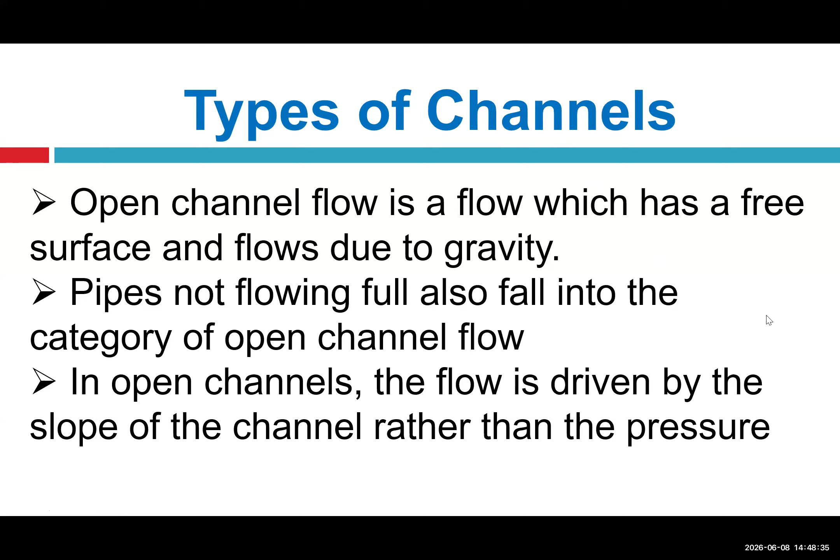So open channel flow is a free flow which has an interface between air and the upper layer of water. Some standard examples of open channel flow in natural systems are rivers, oceans, and overland flow of rainfall, which are examples of free flow that occurs in nature. Can we go to the next slide, please?

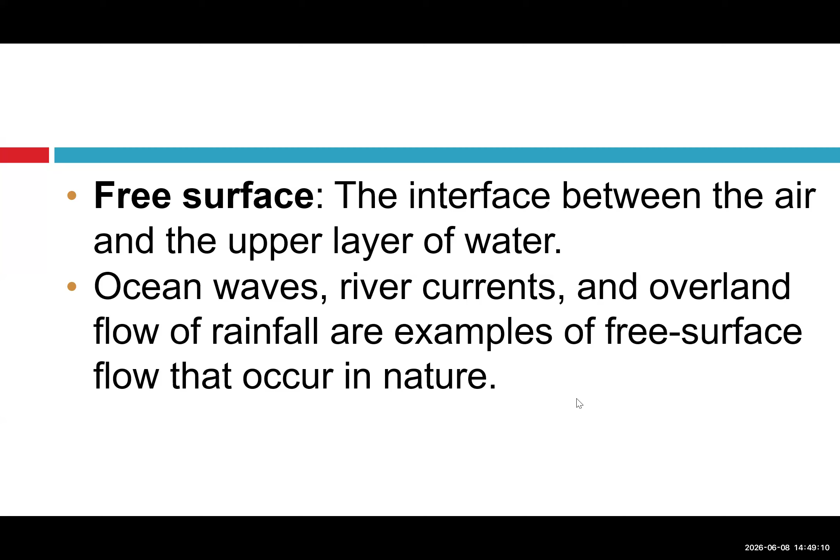So open channels are classified in two different ways. One is natural and another one is artificial channel. So natural channels are like rivers, hillside streams, small rivers, tidal estuaries, small streams, nalas, all categorized as natural open channels, which have irregular shape. Whereas some open channels are categorized as artificial or man-made channels.

So in this, we can classify drains, sewage drains, culverts, sewers, and tunnels. All are examples of artificial or man-made open channels. Can we move to the next slide?

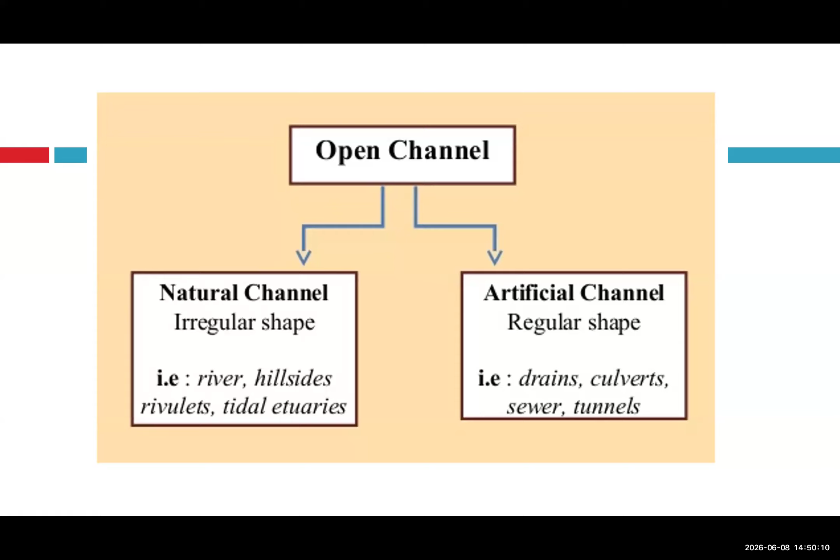Here is the distinction between open channel flow and pipe flow, a standard comparison on the basis of several criteria. So the first criterion is free surface. Open channel flow has a free surface, whereas pipe flow does not have a free surface when it runs full. Then the force which drives the flow in both systems, one is the open channel system and another one is pipe flow.

The driving force is gravity in case of open channel flow, whereas the driving force in pipe flow is pressure difference, or you can say it is a pressure flow. Pressure is hydrostatic, atmospheric at the surface, and in pipe flow it is internal pipe pressure. Examples of open channel flows are rivers, canals, streams, etc. While examples of pipe flow are water supply pipes, oil pipes, and chemical pipelines, all categorized as pipe flow.

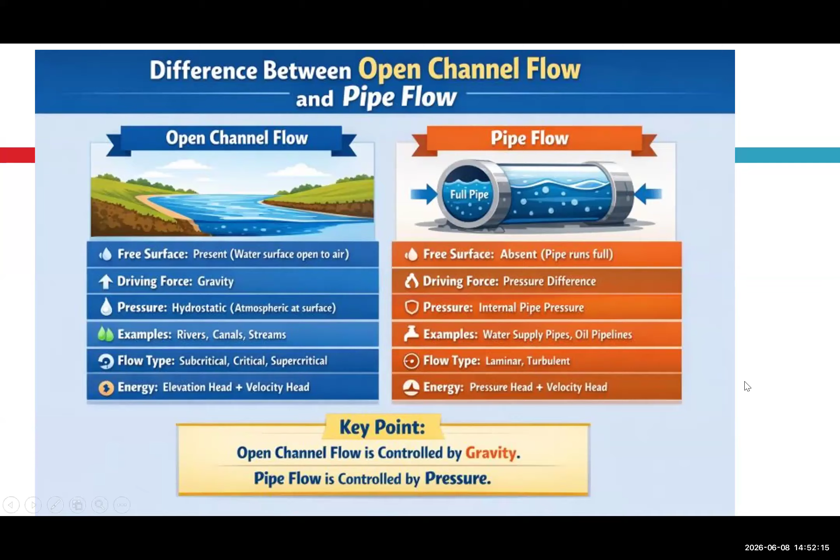In open channel flow, the flow has different types: subcritical, critical, and supercritical. While in pipe flow, the flow can be categorized as laminar and turbulent flow. From the energy point of view, open channel flow has elevation head plus velocity head, or datum head, potential head also. And energy in pipe flow is pressure head and velocity head. Can we move to the next slide, please?

So types of flow in open channel flow. Now we are coming to open channel flow, and here we are discussing different types of flow. From certain criteria, we can majorly classify the types of flow as steady and unsteady flow, uniform and non-uniform flow, laminar and turbulent flow, and subcritical, critical, and supercritical flow. The next slide, please.

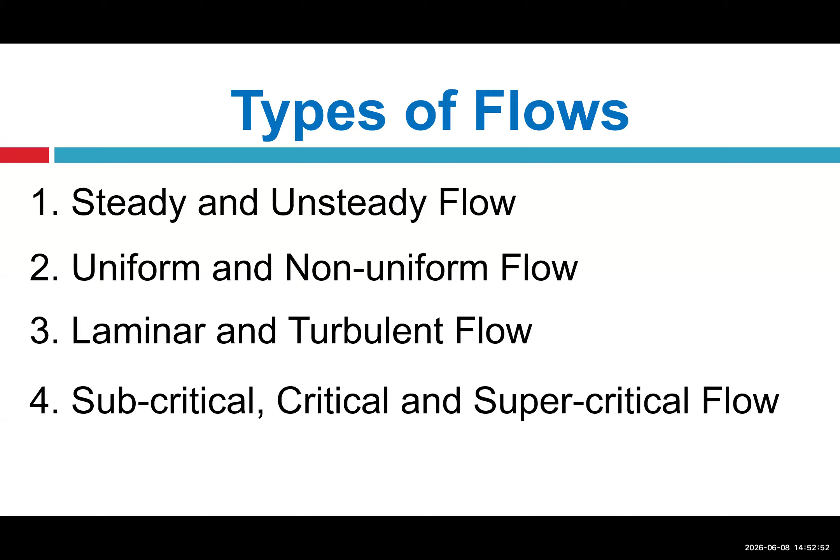Now, let us see how we can categorize steady and unsteady flow. In layman's words, steady means things which don't change with respect to time. That is called a steady condition. In open channel flow, the steady condition means flow parameters like flow rate, velocity, depth, etc. do not change with respect to time. That is called a steady state of flow.

So taking the partial derivatives, ∂Q/∂t = 0, ∂V/∂t = 0, and ∂y/∂t = 0. However, the flow is unsteady if parameters like flow, velocity, depth, or any other parameter change with respect to time at a particular section. In this situation, the partial derivative of discharge, velocity, depth or slope with respect to time is varying and not equal to 0. That is why this kind of flow is called unsteady flow. Can we go to the next slide?

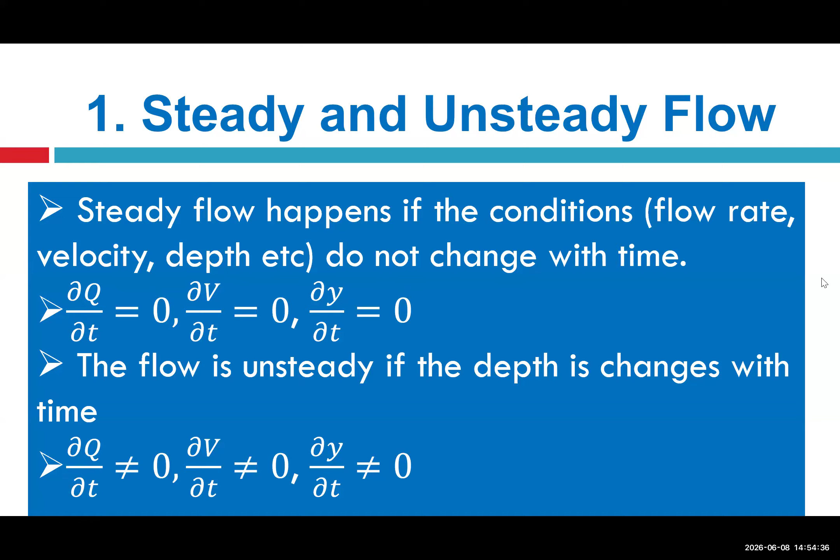Uniform and non-uniform flow. Uniformity means something which doesn't change with respect to space, or in open channel flow, if for a given length of channel, the velocity, depth, or discharge at a particular cross section remains constant throughout the channel section, we call it uniform flow. So the equations are del Q over del S equals 0, del V over del S equals 0, and del Y over del S equals 0. Whereas del Q over del S not equal to 0 signifies non-uniformity of flow. In non-uniform flow, any parameter like discharge, velocity, depth, or slope is not constant with respect to space, referring to the particular reach of channel under consideration. So this is about uniform and non-uniform flow.

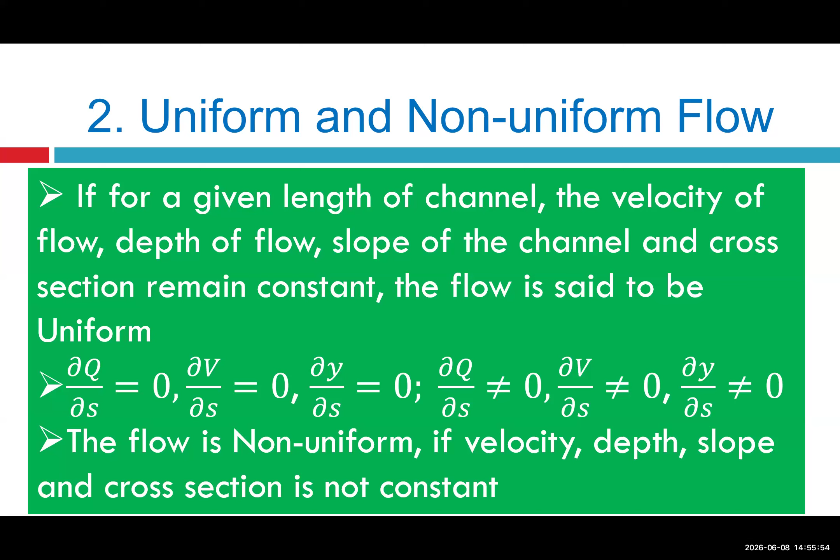Now coming to the next type of flow. So here we are coming to non-uniform flow. We have understood that with respect to velocity, depth, or discharge, it doesn't remain constant over space, meaning the direction. So non-uniform flow is again classified into two types: gradually varied flow and rapidly varied flow.

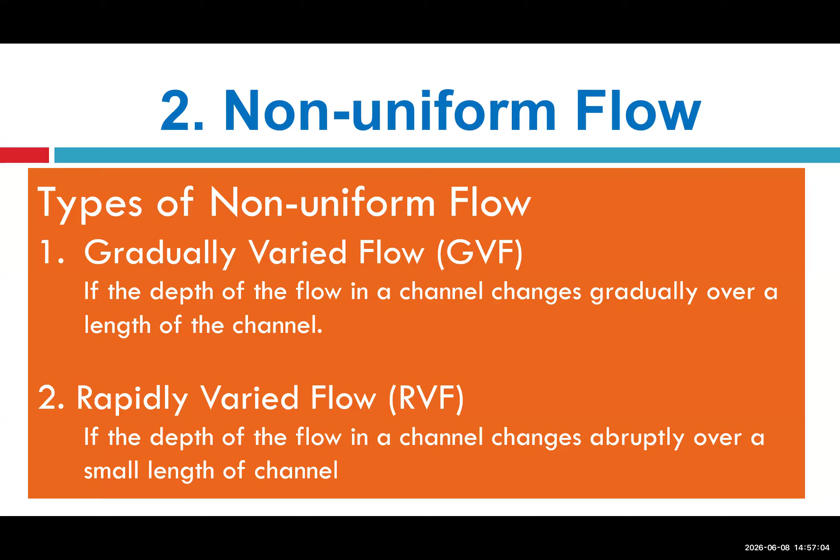If the depth of flow changes slowly over a long reach of canal or channel, and the changes happen gradually, we call it gradually varying flow. However, as the name implies, rapidly varying flow means if the changes in flow happen abruptly over a small length of channel, we call it rapidly varying flow.

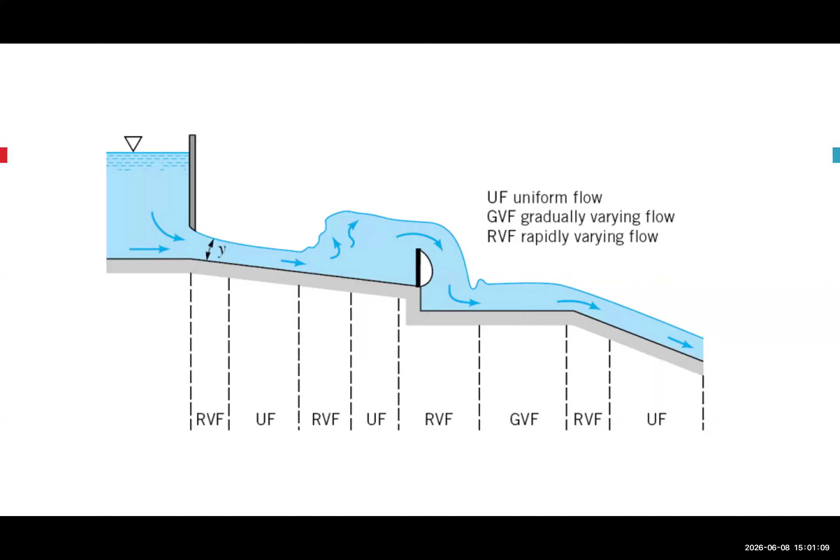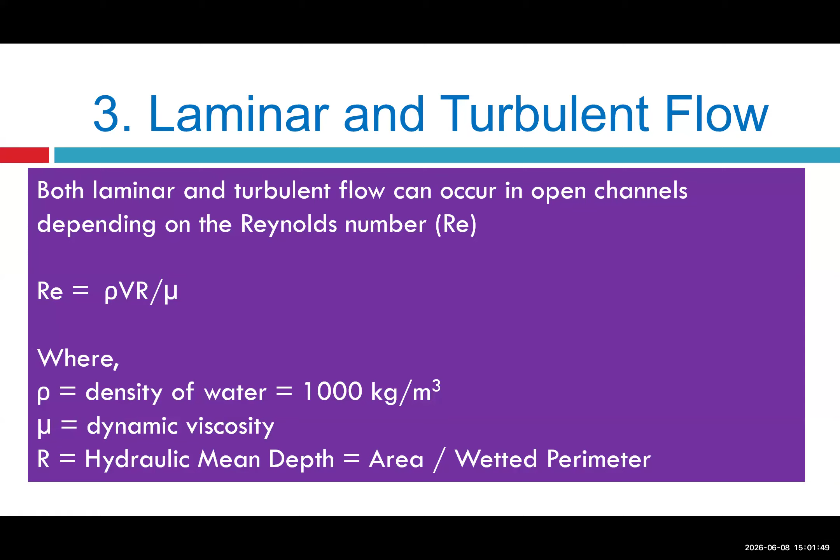The laminar and turbulent flow conditions are the two types which we denote based on the Reynolds number. The equation for Reynolds number is well known: rho VR upon mu, where rho is the density of water, mu is the dynamic viscosity, and R is the hydraulic mean depth, or simply the mean depth. So Reynolds number is the parameter which decides whether the flow is laminar or turbulent.

In open channel flow condition, the Reynolds number represents laminar flow when it is less than 500, transitional flow when Reynolds number is greater than 500 and less than 1000, and turbulent flow condition when Reynolds number is greater than 1000.

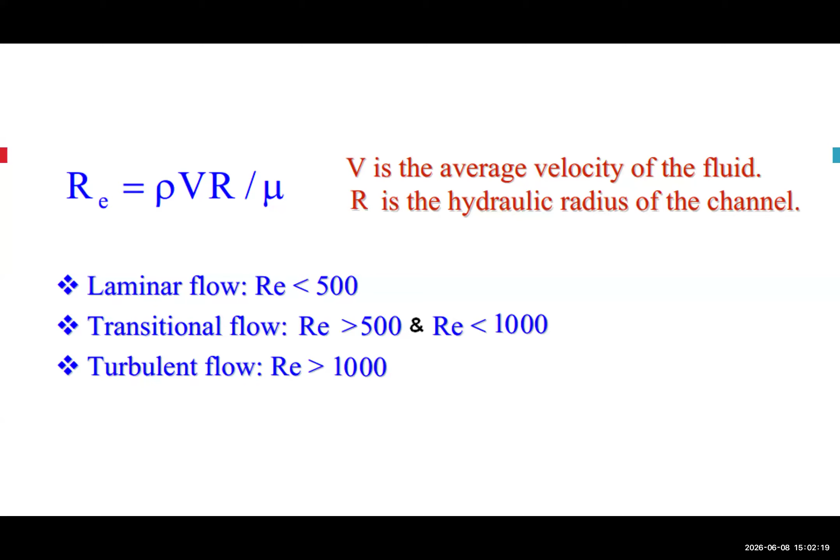Now the fourth type which we are going to discuss is subcritical, critical, and supercritical flow. The criticality is signified with reference to the Froude's number.

The flow in the open channel is said to be subcritical if Froude's number, signified as Fe, is less than 1. Froude's number has the equation Fe equals V upon root GD, where V is velocity of flow, D is the hydraulic depth of channel, equal to the ratio of wetted area to the top width of channel. Here it is written as D, sometimes we also refer to it as R. It's the same thing.

Subcritical flow is also called tranquil or streaming flow. For subcritical flow, the Froude number is less than 1. For critical flow, Froude number is equal to 1. And for supercritical flow, the Froude number is greater than 1. Supercritical flow is also called shooting or rapid condition of flow.

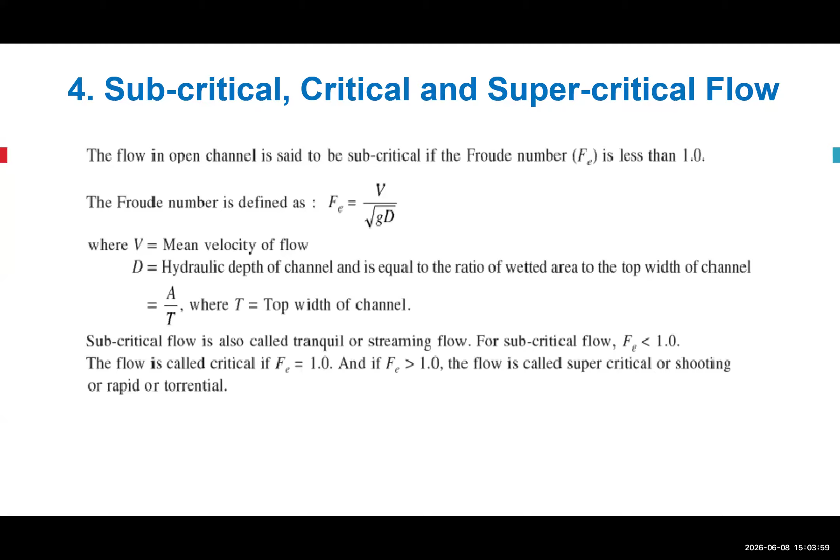So in that situation we call it a hydraulic jump. That condition is called a hydraulic jump. But we will discuss all these things in detail in the later slides.

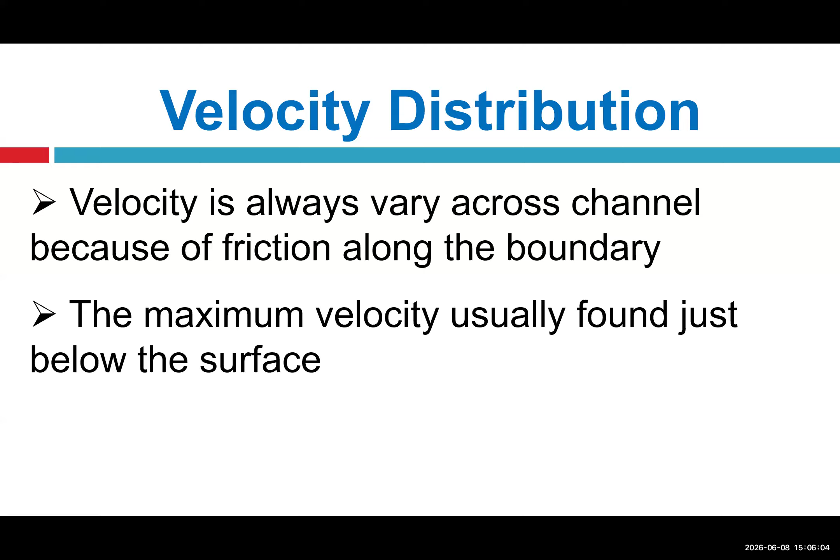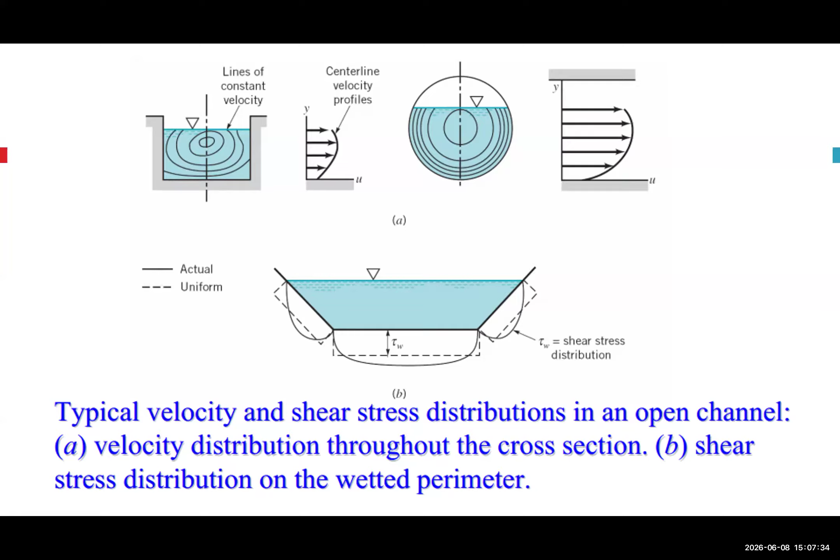Now we are talking about uniform flow situations, and we are discussing several equations used for the calculation of uniform flow and understanding uniform flow conditions. The discharge through open channel flow is computed, and several scientists have contributed to this. Velocity calculation is done by Chezy's formula as well as Manning's formula, where Chezy's constant C and Manning's constant N are used. Bazin's formula and Kutter's formula are also used for velocity and discharge calculation. Next slide, please.

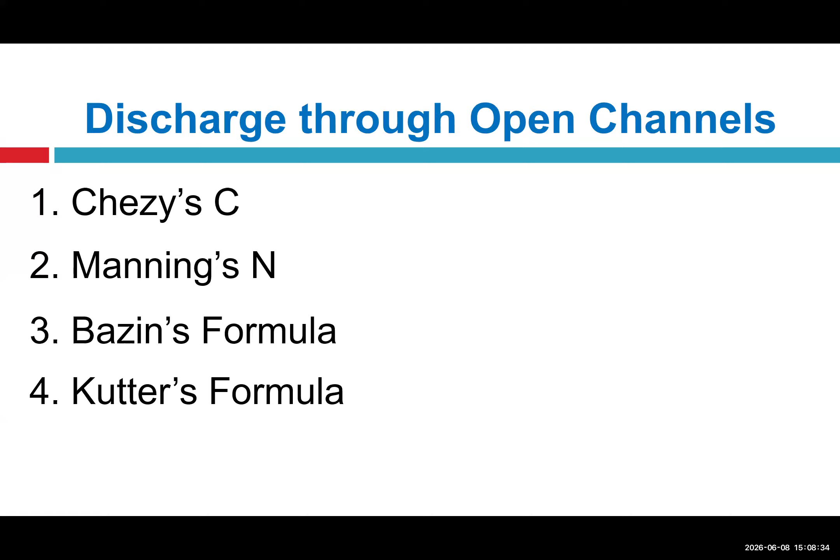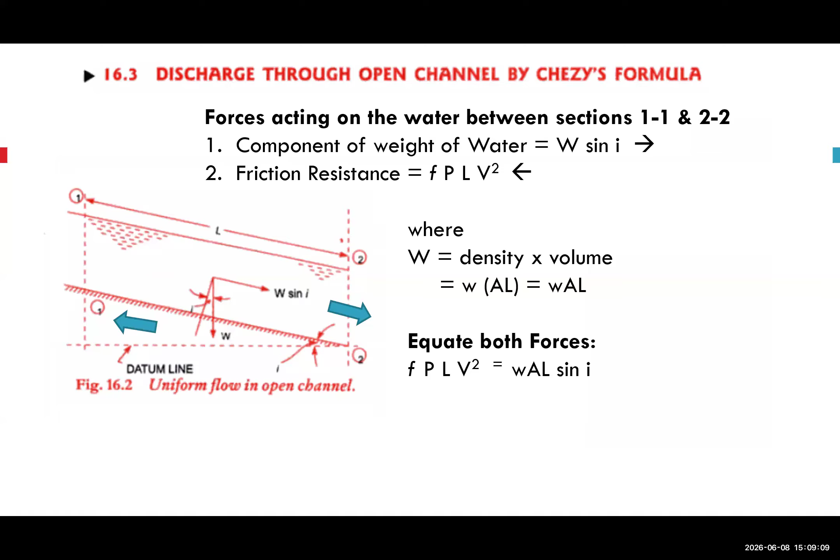Here, a simple example of uniform flow condition is presented. The component of weight is W sine I, where I is the slope, represented between section 1 and 2. The frictional resistance against the water is F P L V square. When we compare both, we get F P L V square equals W A L sine S, also considered as slope I. Next slide, please.

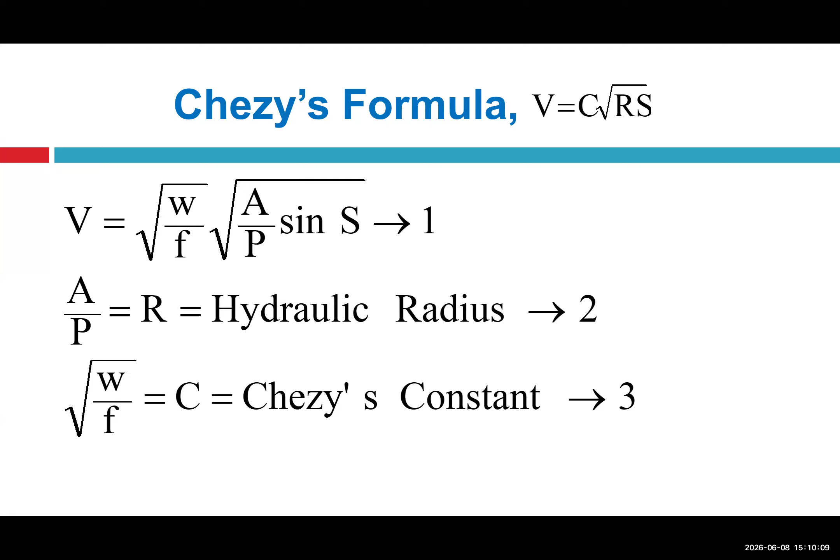Chezy's formula is V equals C square root of R into S, where R is hydraulic mean depth, that is area divided by perimeter, and S is the longitudinal slope of the channel. V is elaborated as square root of W upon F, into square root of A upon P sine S. But sine S is very small, so instead of sine S we consider it as S. Hydraulic radius is A upon P, and W over F is used as a constant, referred to as Chezy's constant. Next slide, please.

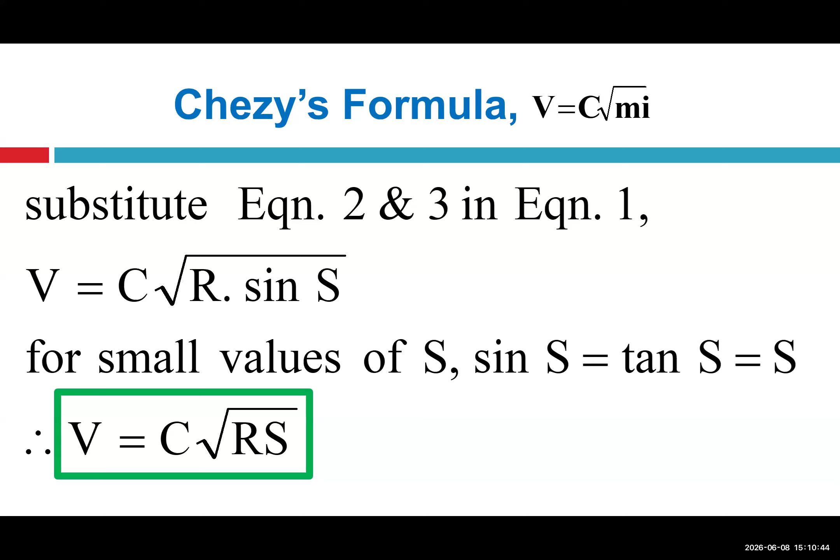In Chezy's constant, the initial equation was V equals C square root of R sine S. But for small values, sine S equals tan S equals S, so we consider the model as V equals C into square root of R into S. Next slide, please.

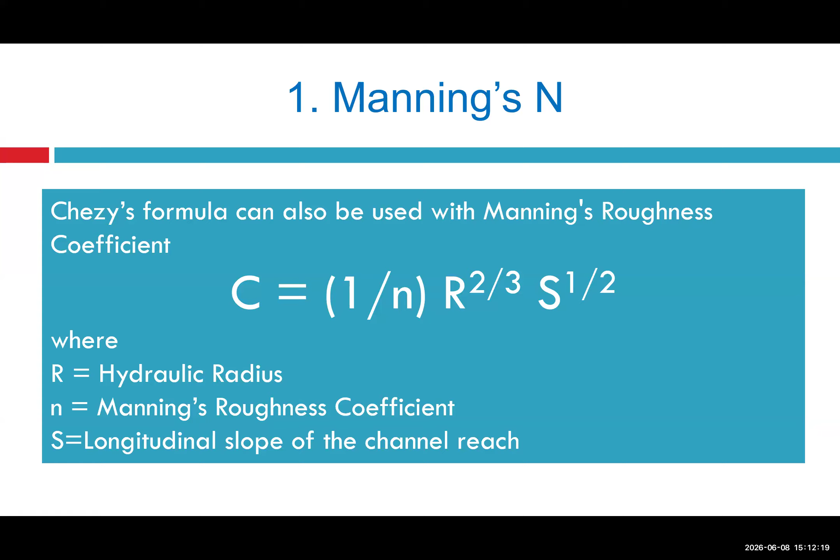Another equation is Manning's equation. There is a typing mistake here - instead of C we should consider C as velocity V. V equals 1 upon N, R raised to 2/3, S raised to 1/2, where N is Manning's roughness coefficient. This roughness coefficient depends on many parameters, like stage of flow in the channel and different kinds of vegetation - for big grass, small shrubs, N value is different. For N values, you can refer to tables from FAO and US Army Corps of Engineers. USGS has several standards and tables for different types of vegetation, flow conditions, stages, and bed and bank material. N value varies based on various parameters. S here is the longitudinal slope of the channel reach. Next slide, please.

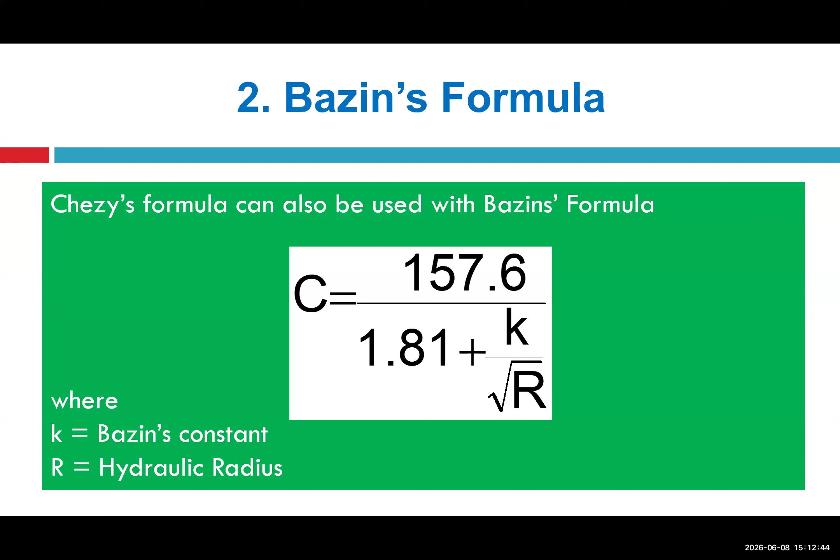Another constant is in Bazin's formula. Here C is 157.6 divided by 1.81 plus K upon square root of R, where K is Bazin's constant and R is hydraulic radius. Next is Kutter's formula. Can we please move to the next slide?

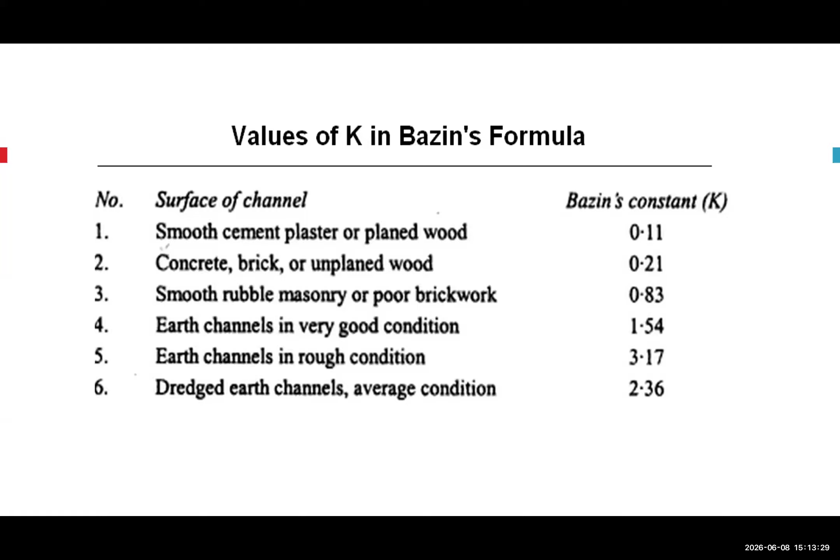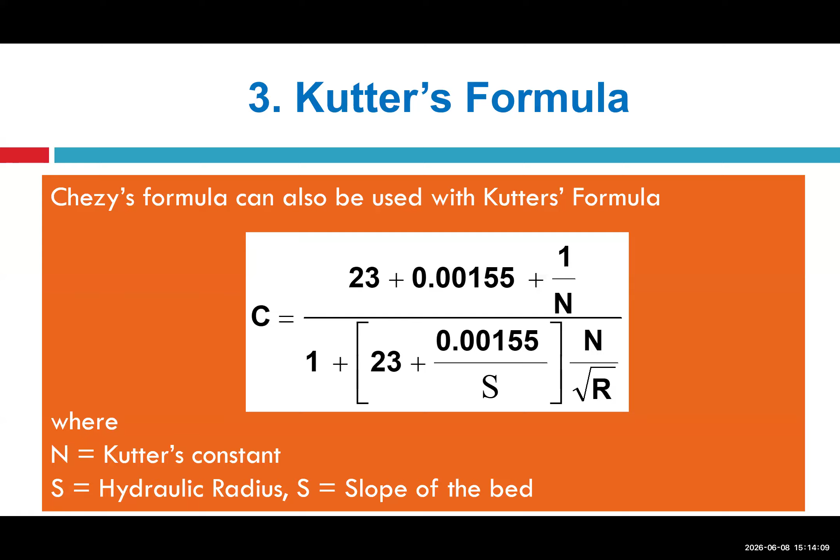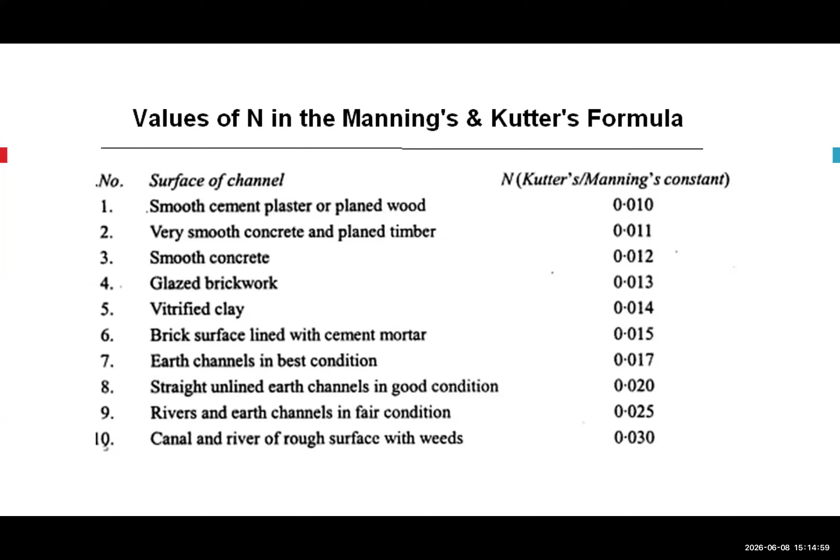Just a second. I just want to take a... yeah. So

Can we move to the next slide, please? Now we are coming to the economical channel section. No, previous one, please. So most economical channel sections here we are discussing. Most economical channel sections are the kind of channel section in which the cost of construction is a minimum. So it has a minimum perimeter, and the minimum or optimal perimeter which can allow maximum discharge is called a most economical channel section.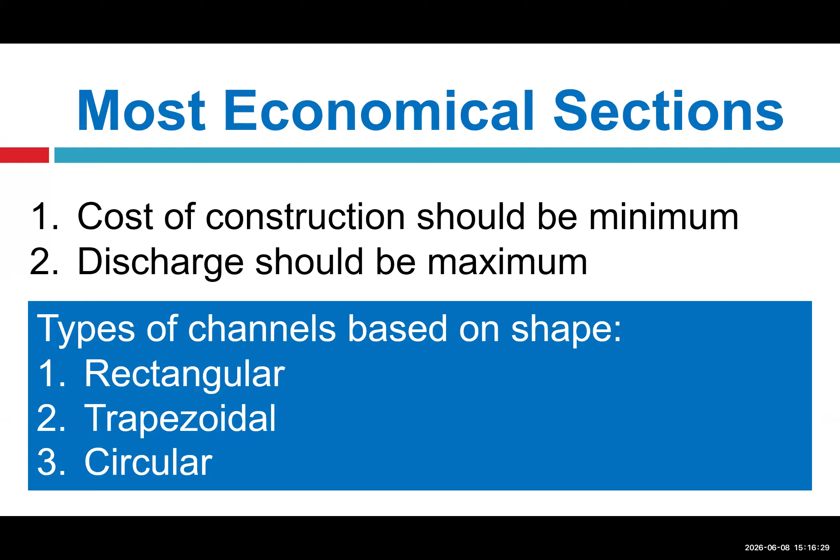Here we are going to discuss the most economical channel section for three different types of channel shapes: rectangular, trapezoidal and circular channels. So next slide, please.

For the most economical channel sections, for discharge we will use the continuity equation. And for velocity, we can use either Chezy's or Manning's equation, as per convenience and as per the data or parameters available in the field. So P minimum and Q maximum is the condition where we can attain the most economical channel section. Next slide, please. This is an example of a channel section. Next slide.

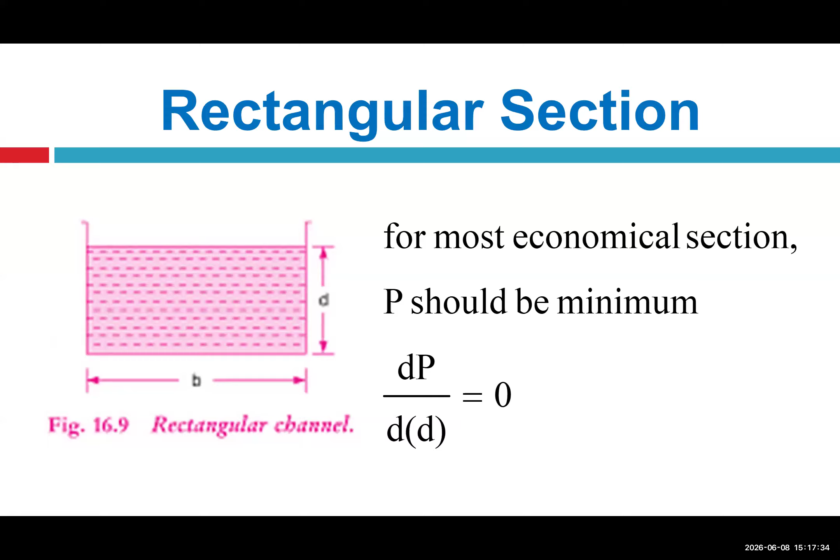Yeah. So the most economical rectangular channel. For the most economical rectangular channel, P should be minimum. So for that, we can differentiate the equation of perimeter with respect to depth. Next slide, please.

So these are the derivations. I will not go deep into this differentiation, but I will just reach the condition, the last one, where hydraulic radius, sorry, mean hydraulic depth or hydraulic radius is d/2 for the rectangular channel section. So in the most economical rectangular channel section, hydraulic radius will be d/2, and depth will be b/2.

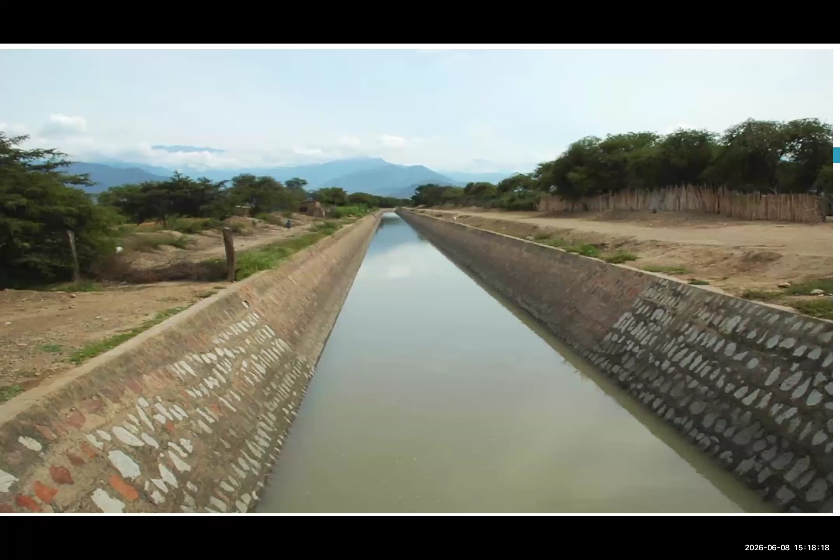Next slide is a trapezoidal channel section. Next slide, please. Here for the economical trapezoidal channel section, again we will differentiate the equation of perimeter with respect to D, depth of flow. Next slide, please. Here, I'm not going deep into the differentiation. If you all need, I can provide you all derived equations for all the conditions.

So for the most economical trapezoidal channel section, top width is equal to 2 times the side of the channel. B plus 2nD divided by 2, half of the top width, is equal to the length of the side of the trapezoidal channel section. Here also the hydraulic radius is D/2, and theta is the angle subtended by the side of the channel with the horizontal. That angle theta is 60 degrees.

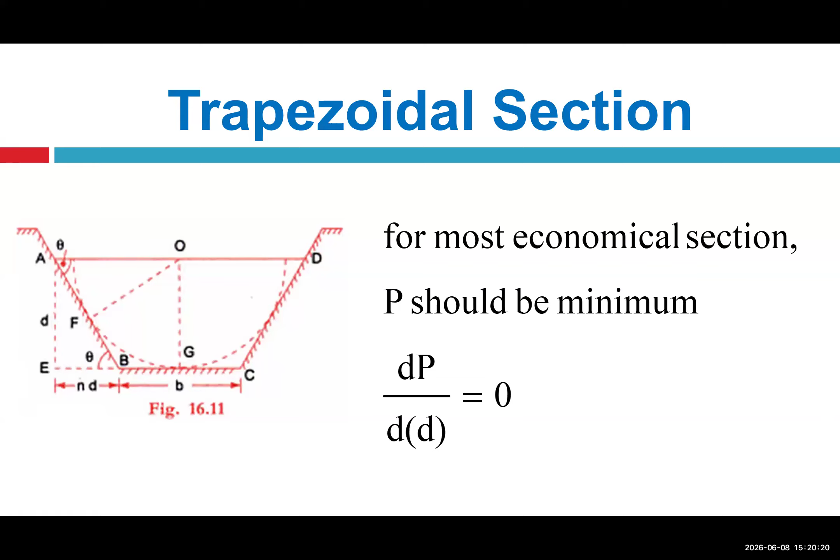In the previous slide, you can see the theta angle here, where the cursor is. This theta angle is 60 degrees in the economical channel section, right? Okay. So the top width, the length of AD, is equal to 2 times AB, the length of AB and CD, right? Next slide, please.

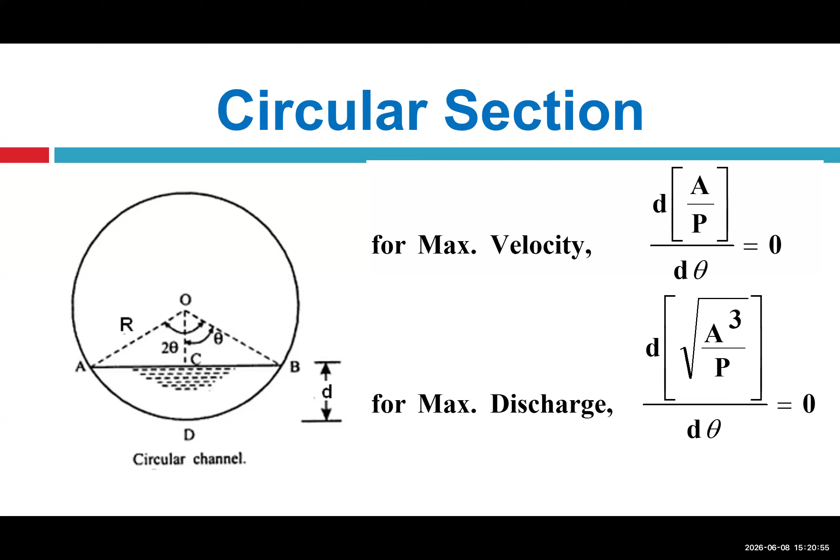Next one is the circular channel section. One more channel section is the triangular channel section. That is not covered here, but if you need, I can share the slide details of the triangular channel section as well. In the circular channel section, the most economical condition is decided based on 2 criteria: one is maximum velocity and another is maximum discharge. Next slide, please.

For the maximum velocity condition, theta is the angle subtended by the ends of the free surface with respect to the center, and that theta is equal to 128 degrees 45 minutes. The depth of water is 0.81 D, where D is the diameter of the circular channel section, and R is 0.3 D for the maximum velocity condition.

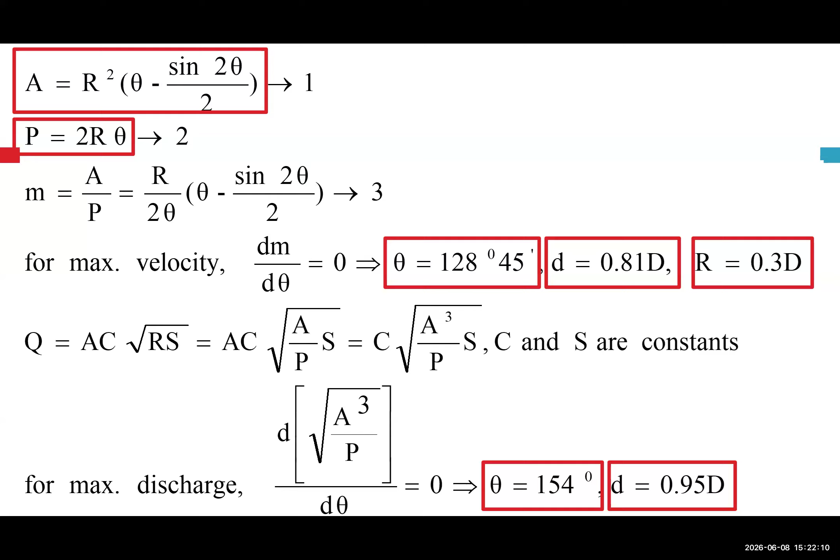Whereas in the maximum discharge condition, theta is 154 degrees and small d is equal to 0.95 D. So these are the conditions attained for maximum velocity and maximum discharge in the case of a circular open channel section. Next slide, please.

Now coming to non-uniform flow. Non-uniform flow is the flow condition when the velocity varies at each section of the channel and the energy line is not parallel to the bed of the channel. This situation is caused by several conditions. So what are those conditions?

Let us understand. One is difference in depth of channel. Next, difference in width of channel. Third, difference in nature of bed. Fourth, difference in slope of channel. And fifth, obstruction in the flow of the channel. These are the different conditions which cause non-uniform flow in the channel. Next.

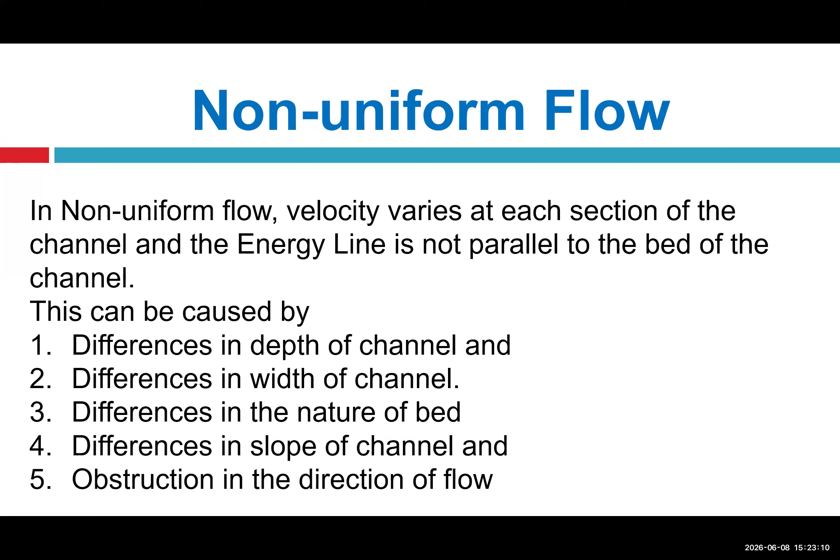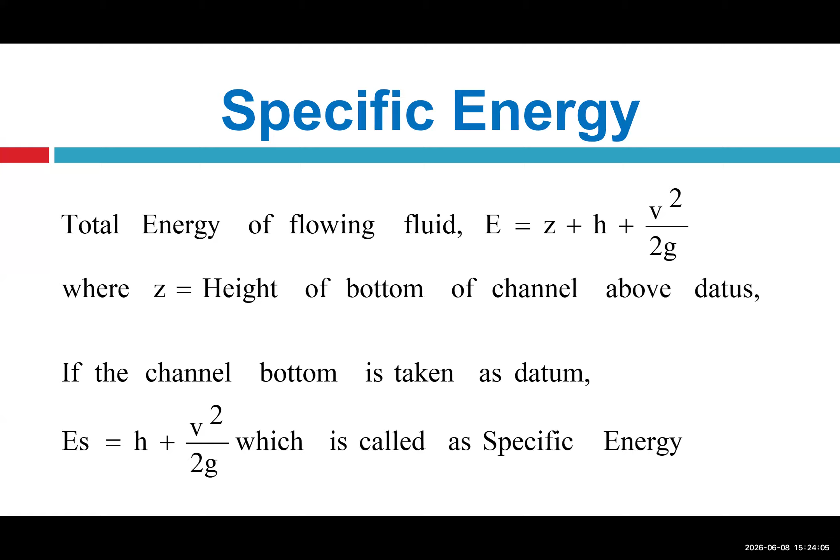When we are talking about open channel flow, obviously we need to know the specific energy concept. So the concept of specific energy is briefly explained here. The fundamental equation which we use for the specific energy is E is equal to Z plus H plus V square over 2G, where Z is the height of bottom of channel above datum. So from the datum line, at what distance the channel is situated, Z is that distance. H is the water head or depth of water, and V square over 2G is velocity head here.

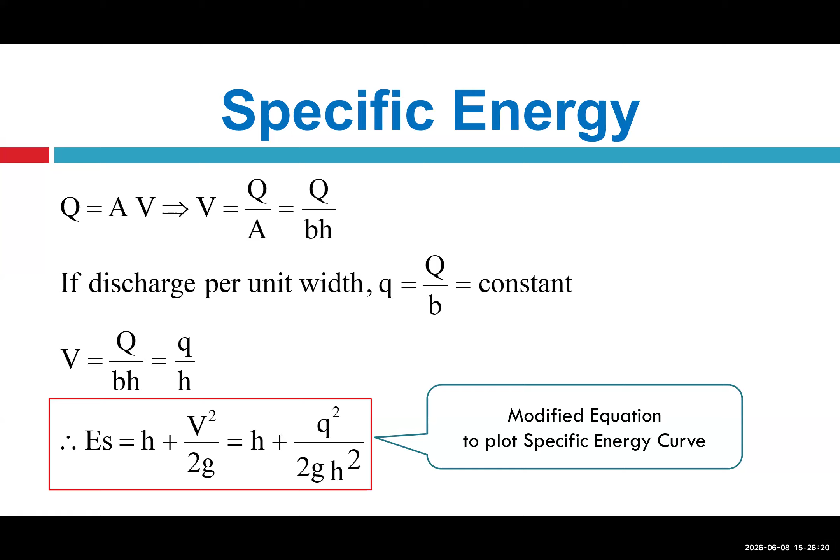The previous equation has two asymptotes. If we plot the energy curve with H on the vertical axis and E on the horizontal axis, we have one linear line at 45 degrees with the horizontal, that is E is equal to H, and another one is a parabolic curve shown in the purple line. And this curve is nothing but E is equal to H plus q square over 2G H square.

Now, when the energy is minimum, that is the critical condition, we need to find the critical depth of the flow. If we differentiate the energy equation E is equal to H plus q square over 2G H square with respect to H and equate it with 0, we find the critical depth, which corresponds to minimum energy. Here we replace H as Hc, because at critical flow the energy is minimum, and at that minimum energy the depth of flow is Hc, the critical depth. So Hc is obtained as q square over G, whole to the cube root.

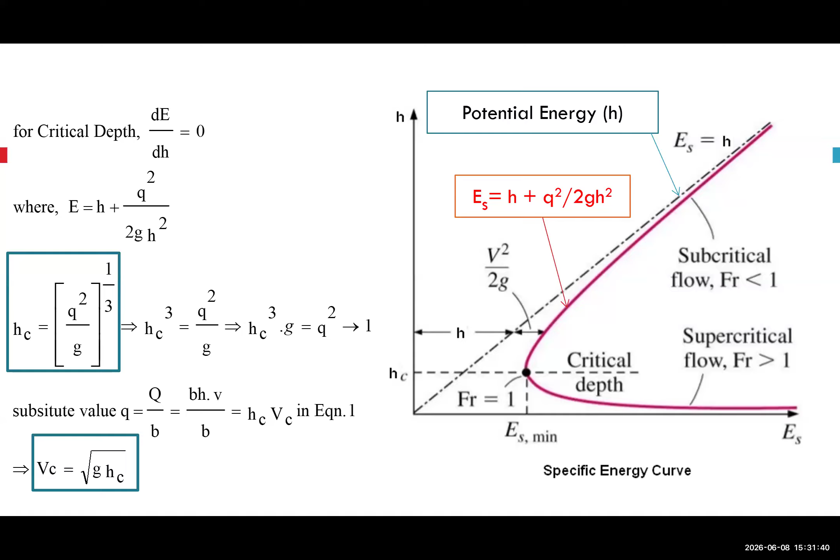Can we move to the next slide, please? Yeah. Next slide. Yes. So minimum and another previous one.

Sorry, previous one. So here we can see that the minimum critical specific energy in terms of critical depth, E is equal to H plus Q square divided by 2G into H square. And when specific energy is minimum, depth of flow is critical, and this critical depth Hc is equal to Q square, that is square of intensity of discharge, divided by G, whole raised to 1/3 power, that is cube root of this.

And finally, substituting in the equation, we can finally get Hc is equal to 2/3 E minimum. That means critical depth is equal to 2/3 of minimum energy, right? Next slide, please.

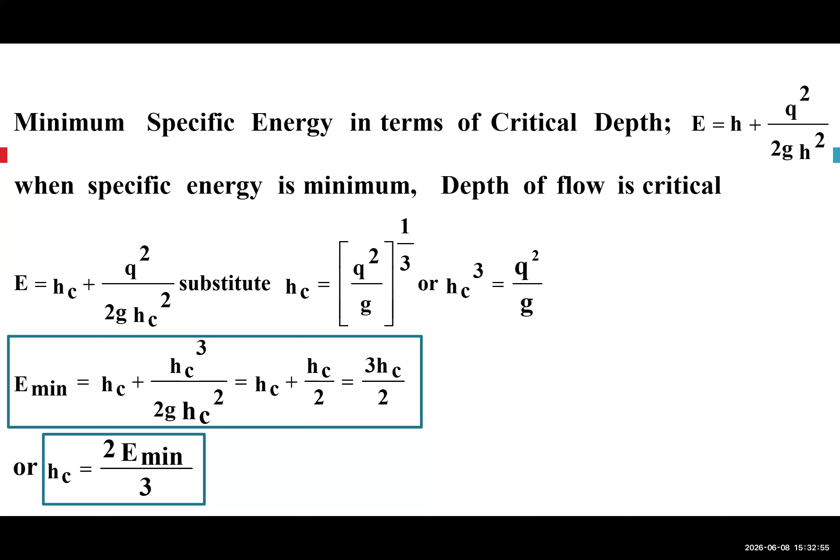So this is shown here with an example specific energy curve in a sluice gate which has a small opening, and flow is taking place from the opening. When the flow is taking place, if we project the water surface line and the different water level lines on the specific energy curve, you can see how the flow is initially in supercritical flow, and then it attains subcritical flow.

And obviously when the flow is in supercritical flow and it tries to meet the subcritical flow, there is a jump, right? And this is called a hydraulic jump. In this situation, certain loss of energy is happening. But you can see that for any energy, there are two depths.

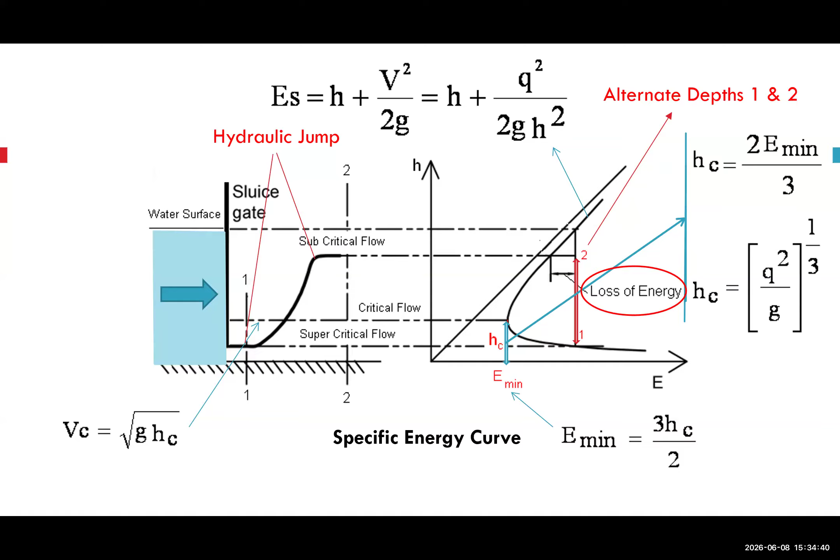And these two depths, depth 1 and depth 2, shown by the red arrow and the marks 1 and 2, are called alternate depths. One is in the subcritical region and another one is in the supercritical region. So depth 1 here is in supercritical flow condition, and depth 2 in this curve is in subcritical condition. Next slide.

So alternate depths are the two depths that are possible for a given specific energy for a particular discharge intensity, right? And for these conditions, we have several equations. The discharge intensity is q equals square root of 2g y square into bracket E minus y. And at this condition, Froude number is V by square root of g into y, or you can write it in terms of discharge intensity also.

In terms of discharge intensity, it is small q divided by square root of g y cube, and critical depth is q square over g whole to the power 1/3. Ec is equal to 3 by 2 critical depth, or critical depth is equal to 2 by 3 E minimum. Next slide.

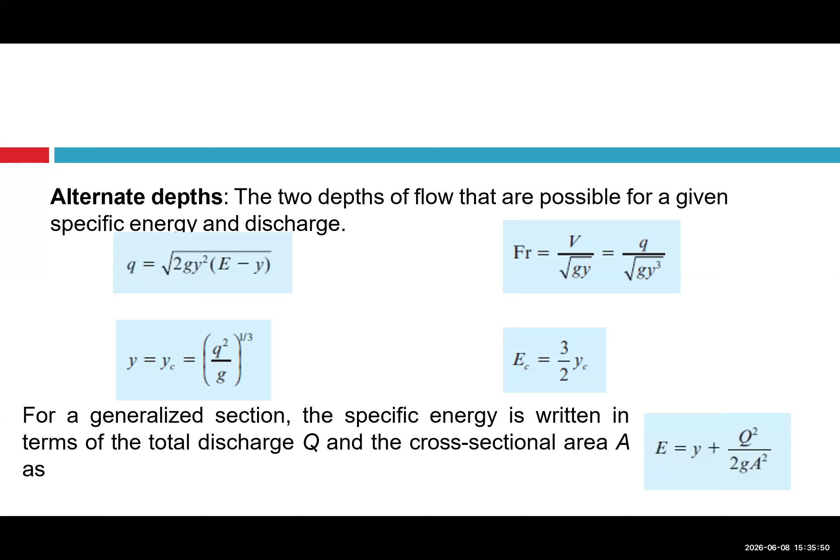And now the concept of specific energy is applied in two different conditions to understand flow transitions. So there are two different types of flow transitions. One is vertical flow transition and another one is horizontal flow transition.

So here, actually all this concept takes too much time. Explaining only specific energy and derivation of alternate depth and all, I take 2 lectures of 50 minutes. So here I'm moving very fast, and I understand that it is an FDP, so concepts are known to the faculty members, and I just brief the important ones.

So this one is the choking condition we are discussing. Choking is the case of vertical transition. The condition of choking of flow implies that the minimum specific energy exists within the transition in case of vertical transition. So it is the case of raised hump. If you refer to any standard book like Open Channel Flow by Ven Te Chow, or by Hanif Chaudhry, or by Subramanya, you can find this as the raised hump condition.

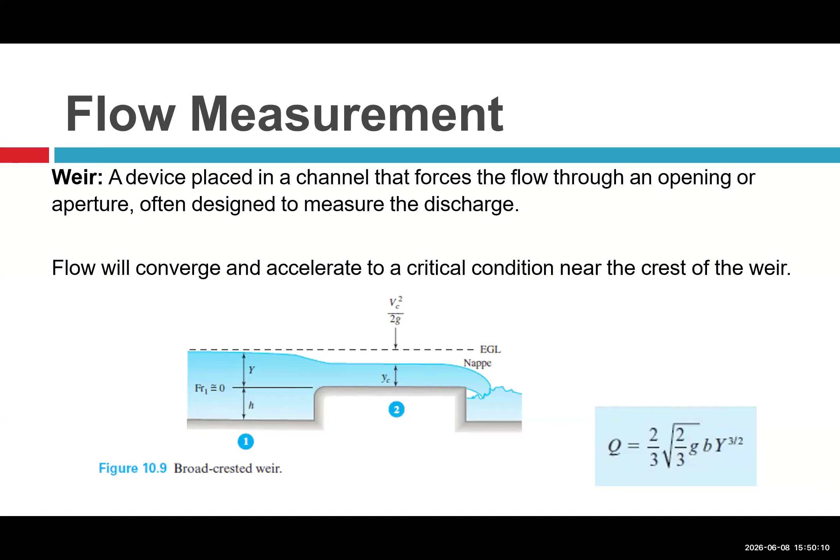Yeah, so we are also supposed to complete the program. So we can quickly move to the slides. Please move to the next slide.

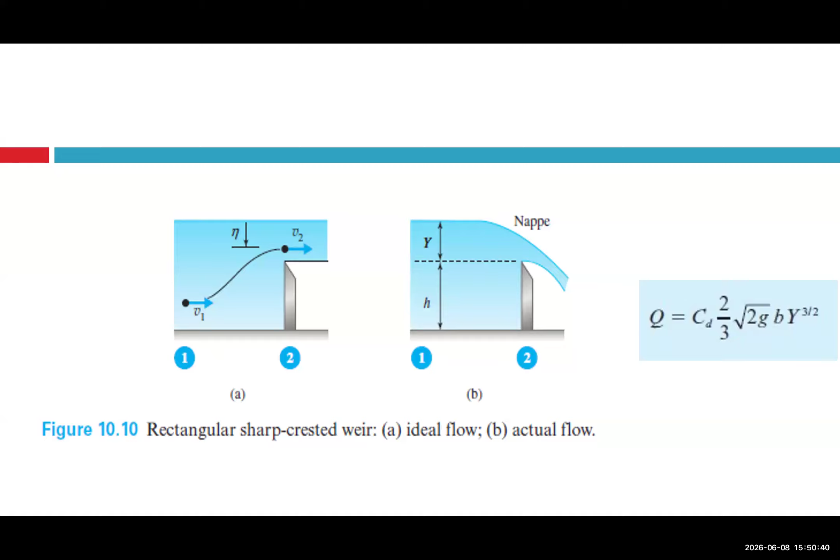This one is another example where we can measure the discharge. This is a sharp crested weir, and in figures A and B there are two types of flow: ideal flow and actual flow condition, where discharge is measured with the formula Q = CD × 2/3 × √(2g) × B × Y^(3/2), where Y is the depth of flow at section 1. Next slide, please.

Another application of flow measurement is the notch. Here we have two types of notch: one is a rectangular notch and another is a triangular notch. The discharge formula used for the rectangular notch is CD × 2/3 × √(2g) × B × Y^(3/2).

And in case of the V notch, or triangular notch, we have the formula CD × 8/15 × √(2g) × tan(θ/2) × Y^(5/2). These are very important expressions on which several MCQs are asked in competitive examinations, where θ is the angle subtended by the two sides of the V notch. Next slide.

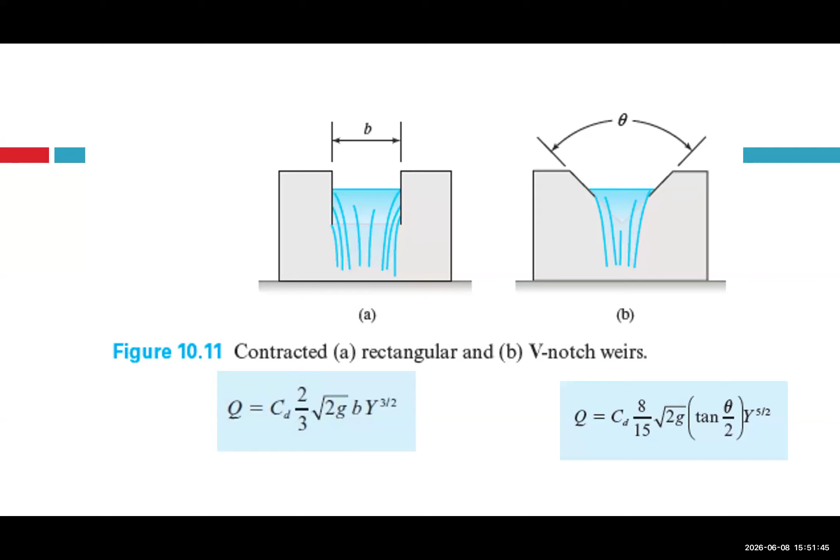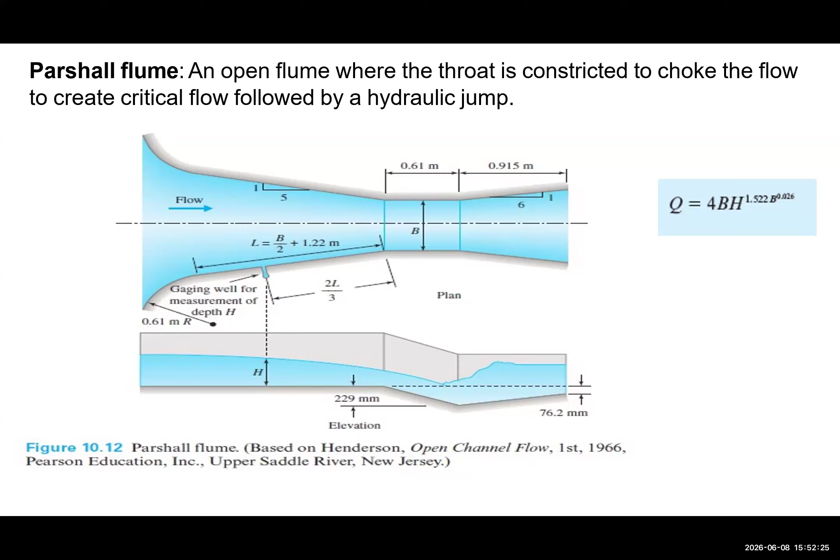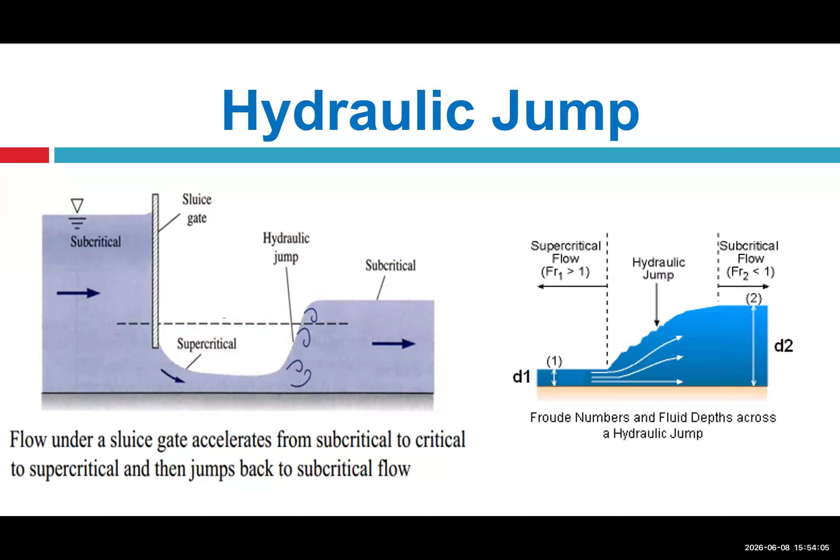To take an example, someone at ground level wants to jump onto the boundary. So what do we do? We take a jump, and because of the jump we can climb onto the boundary of any building. The same way, the flow is also taking a jump here, and this type of jump is called a hydraulic jump. Next slide, please.

Here the momentum concept is also applied to understand hydraulic jump. The momentum is also called specific force. Momentum M = A·Ȳ + Q²/(gA) is the formula. Next.

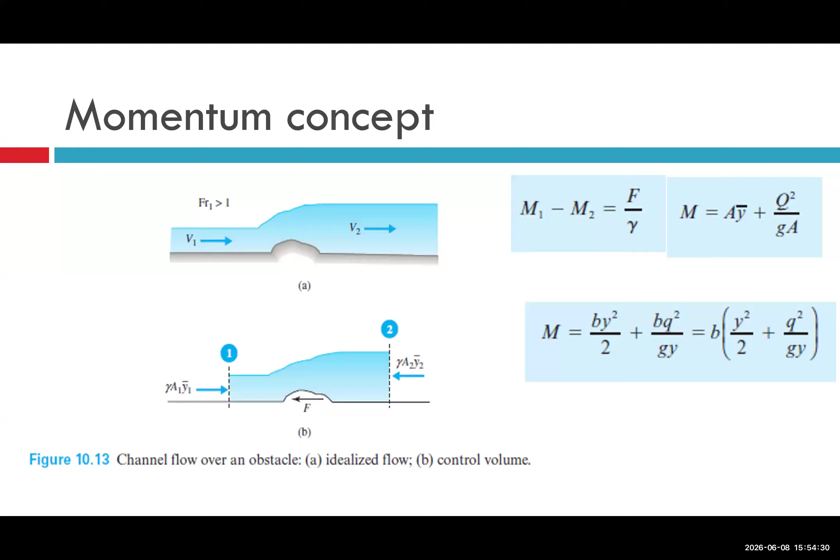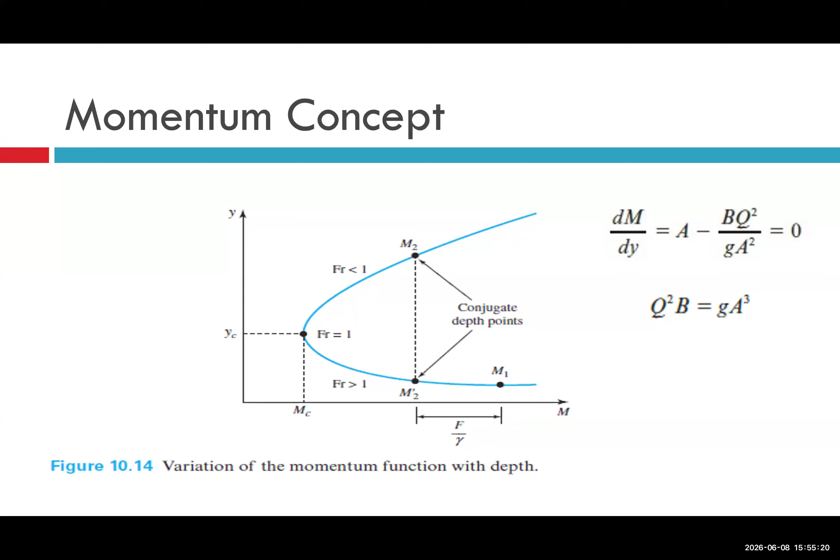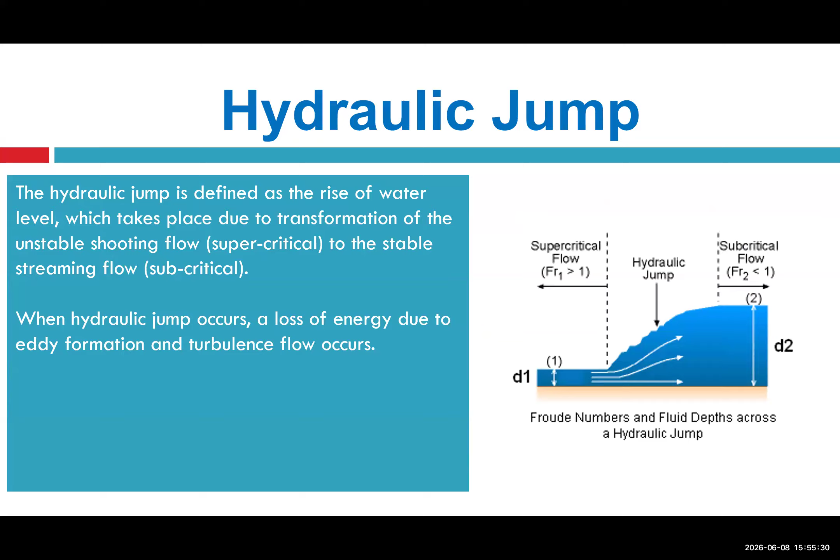In the previous example image of hydraulic jump, D1 and D2 are called conjugate depths. Next slide, please. These are the basics of hydraulic jump. You can move to the next slide.

What are the causes of hydraulic jump? Several causes of hydraulic jumps are: below control structures like weirs or sluices used in the channel, when any obstruction is found in the channel, when a sharp change in the channel slope takes place, and at the toe of a spillway, dam or sluice, etc. Right? Next slide, please.

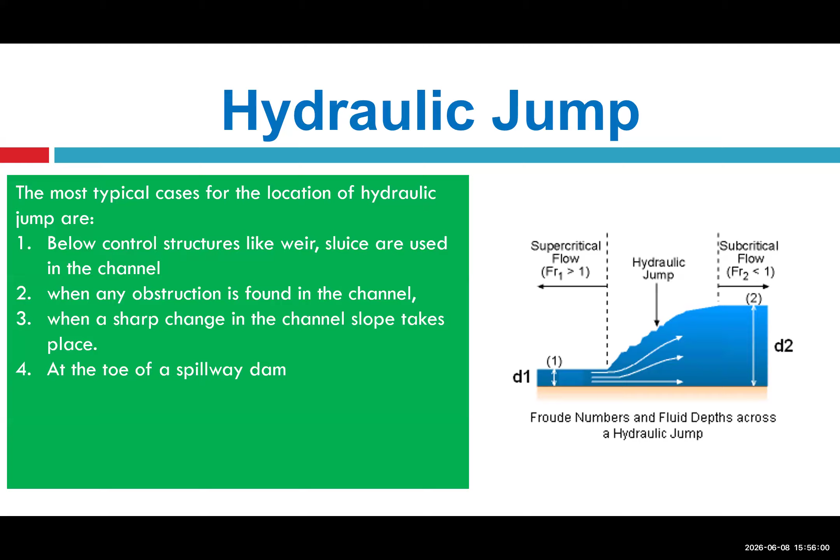The loss of energy which takes place in the jump we can abbreviate as HL. This is the difference E1 minus E2. E1 is the energy at section 1 and E2 is the energy at section 2. So the expression is D2 minus D1 whole cube divided by 4 times D1 into D2.

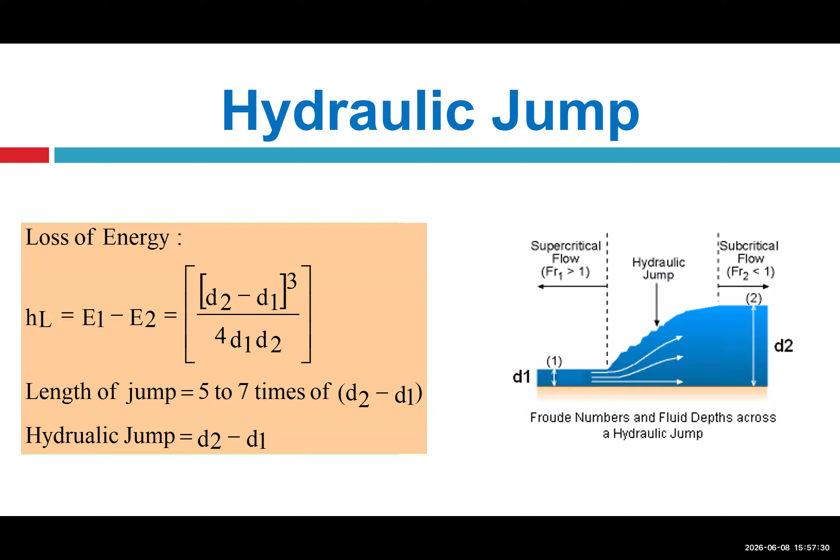Generally, the length from this point to this point is called the length of jump, and the length of jump is 5 to 7 times the difference of D2 minus D1. And the effective depth of the hydraulic jump is D2 minus D1. Next slide.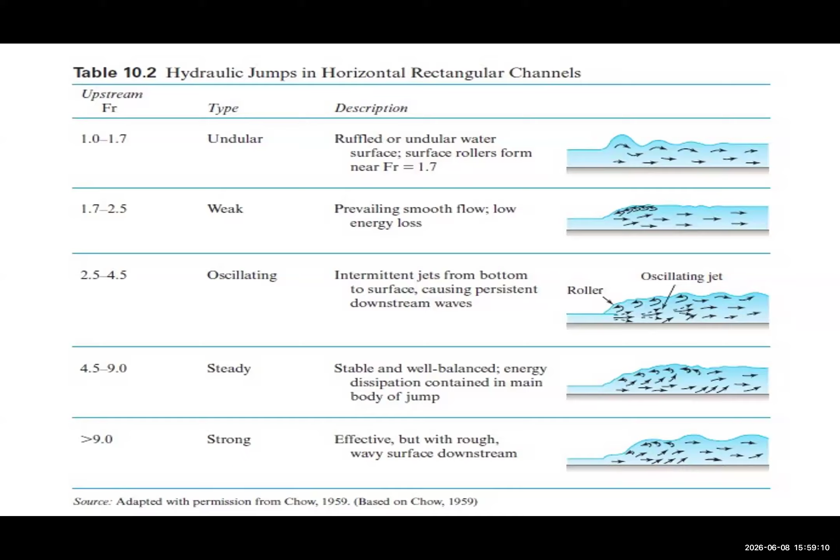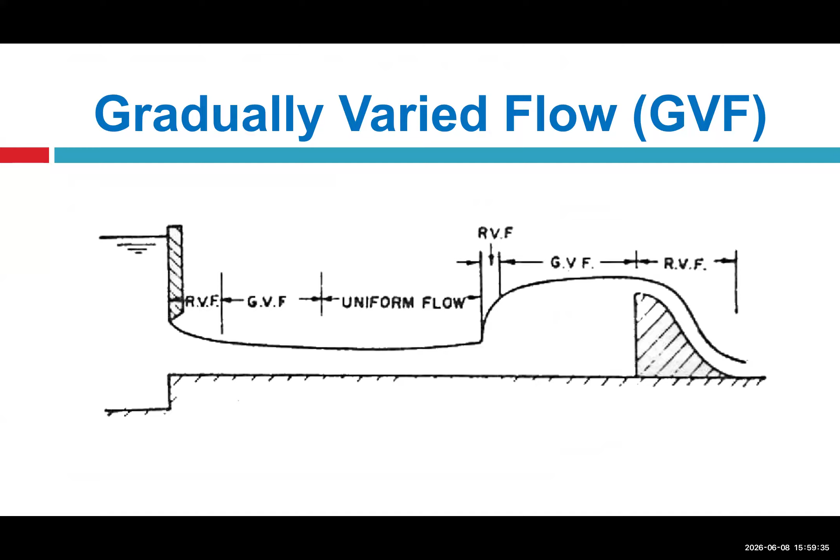This is an example of gradually varied flow. The last type of open channel flow is GVF, which we call gradually varied flow. My cursor is shown here. From this to this, the flow regime is called GVF, gradually varied flow. And here also, before the weir, the GVF is from this to this. Next slide, please.

There are several classifications of GVF with reference to SO and SC. SO is the slope of the channel bed, and SC is the critical slope that sustains a given discharge as uniform flow, where the depth of flow is critical, right? So how are the slopes classified? When SO is greater than SC, or normal depth is less than critical depth, the bed is a steep slope.

For critical slope, the bed slope is equal to the critical slope, and the normal depth of water is equal to the critical depth. For mild slope, the bed slope is less than the critical slope, and the normal depth of water is greater than the critical depth. For horizontal slope, the bed slope is equal to 0, and for adverse slope, the bed slope of the channel is negative. So these are the classifications of slopes. Next slide, please.

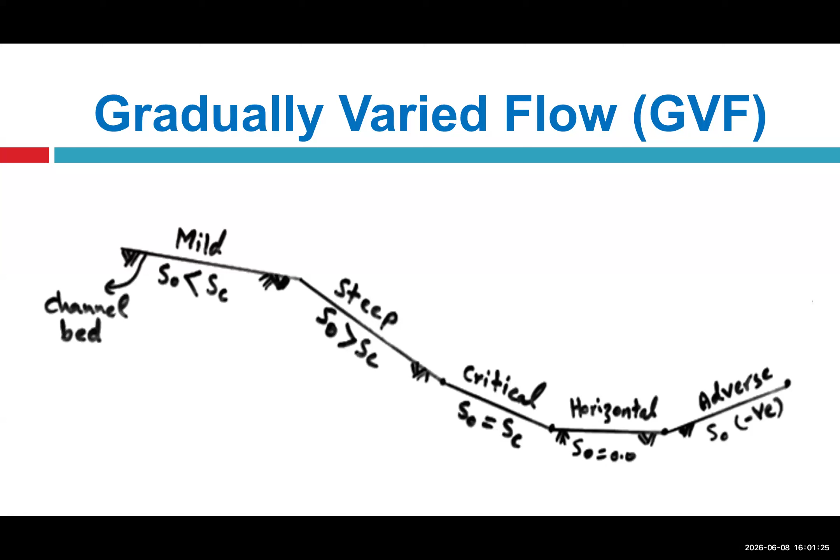Several profiles are there. There are 13 profiles which exist. Clear-cut profiles exist in M1, M2, and M3. M stands for mild slope, and zones 1, 2, and 3 are classified. When gradually varied flow occurs in a zone, if we draw the bottom of the channel, the critical depth and the normal depth of the flow, with reference to that we can classify it as M1, M2, M3. Can we go to the next slide? There we can have a clear idea of how M1, M2, and M3 happen. Can we move to the next slide, please?

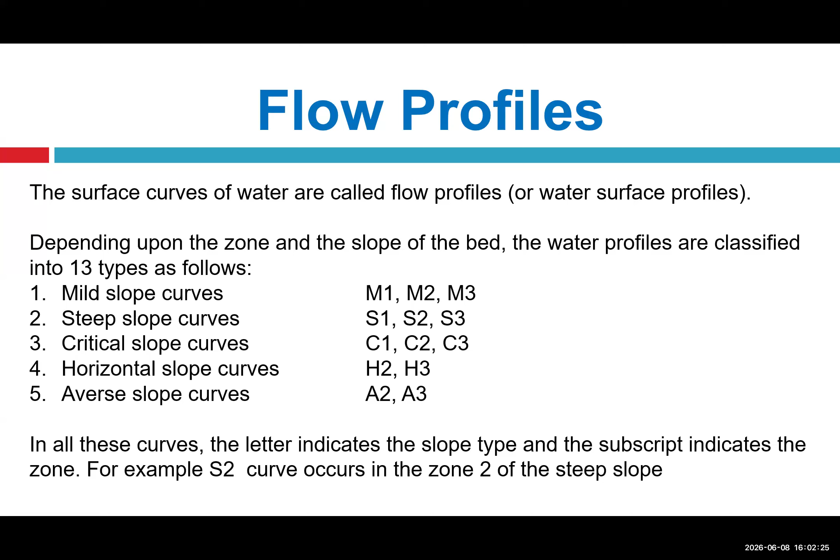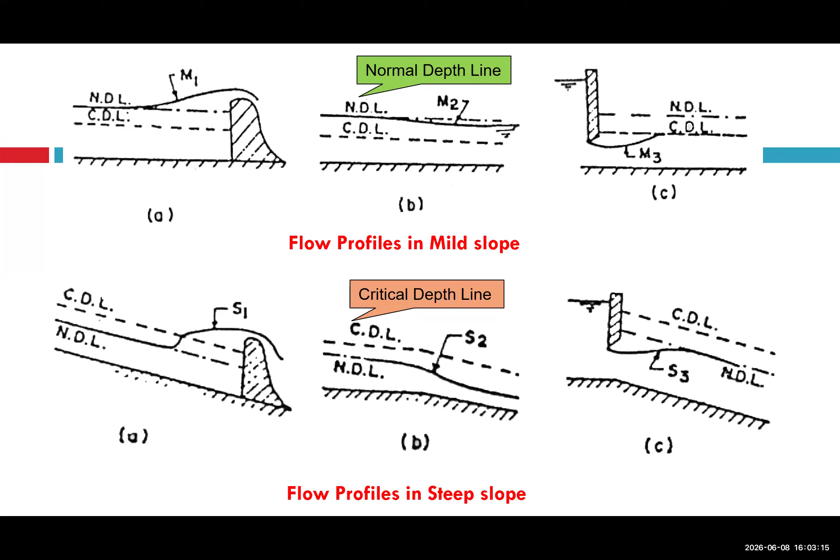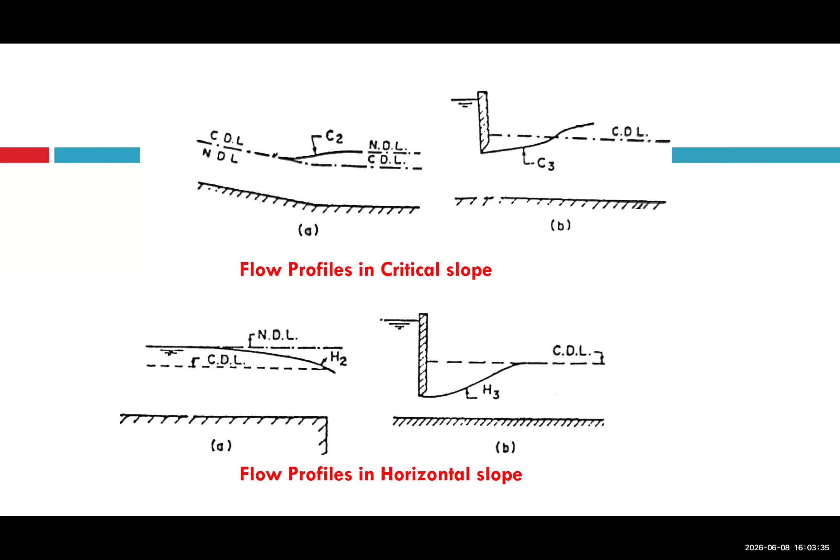In critical zone, critical flow, critical slope, C2 and C3 are happening, and also same way H2 and H3 are happening. There is no C1 and H1. A2 and A3 are also happening.

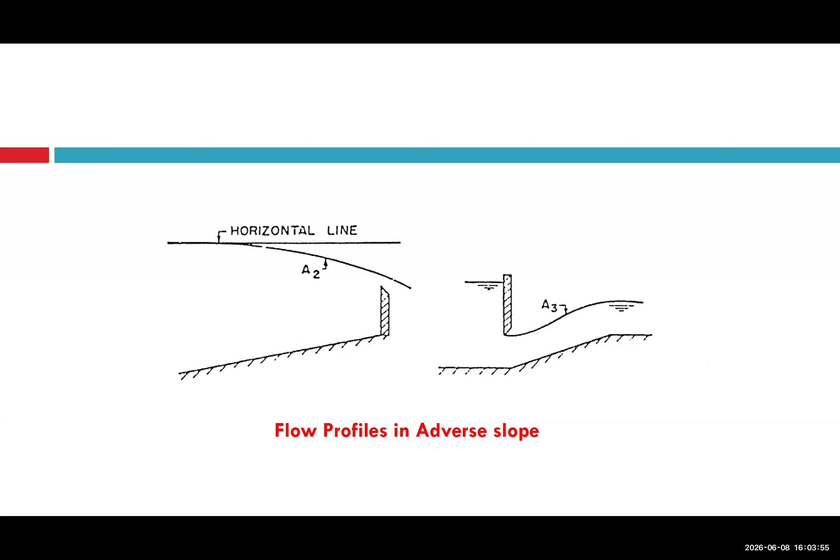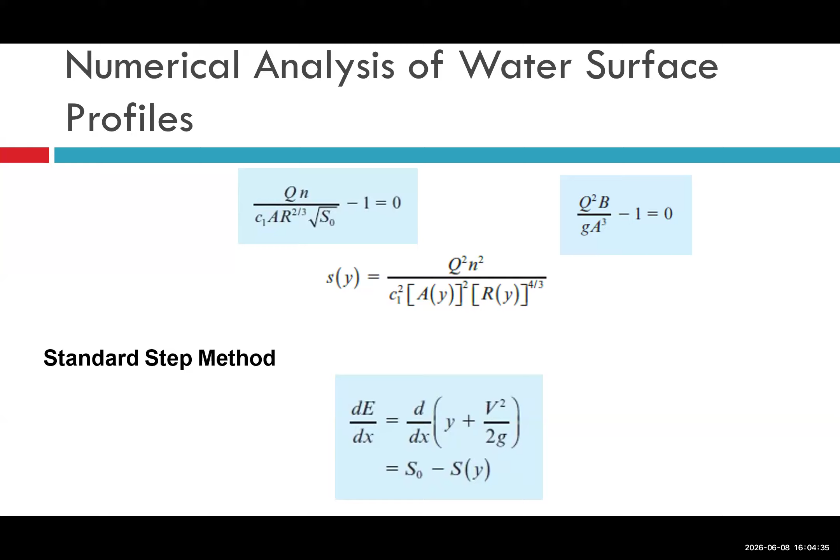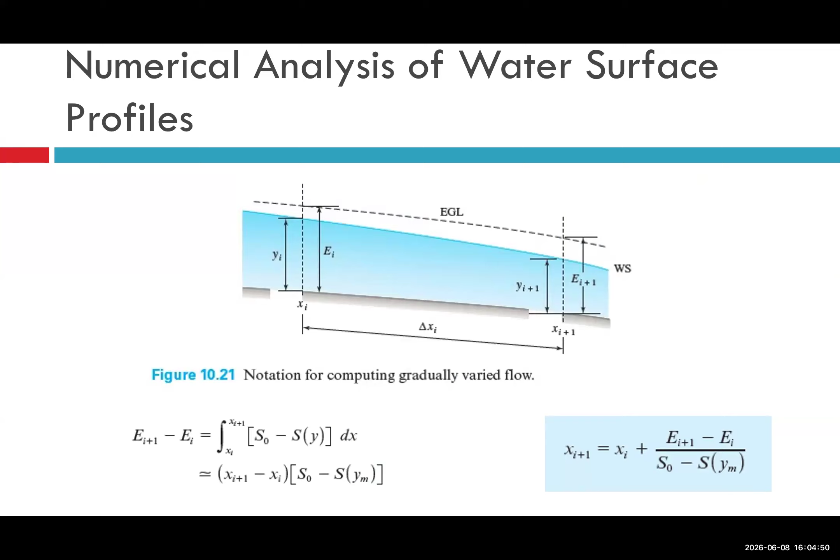See another example of numerical method, analytical method. The expression for this is in equation 1 and 2, as mentioned.

Numerical integration method here: this long expression is used for the numerical integration method, and a useful integration scheme is the 2-point Gauss-Legendre quadrature expression. These analytical methods are applied for the exact calculation of depth.

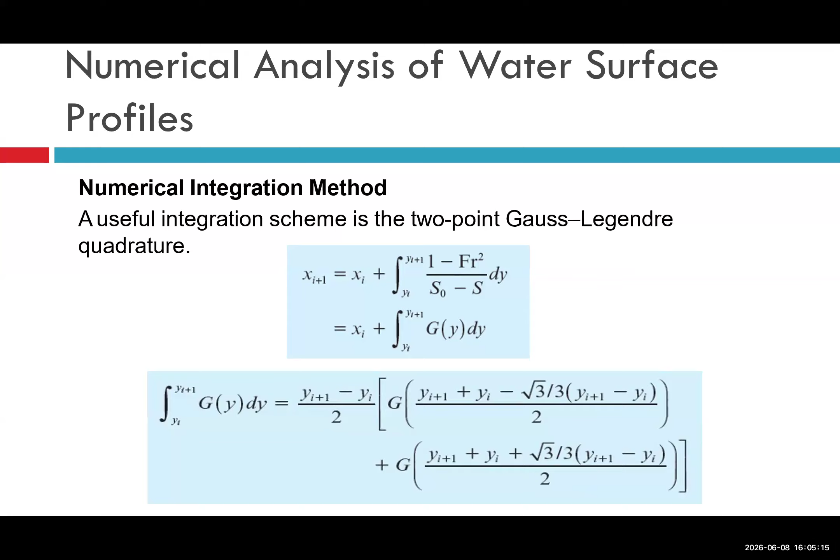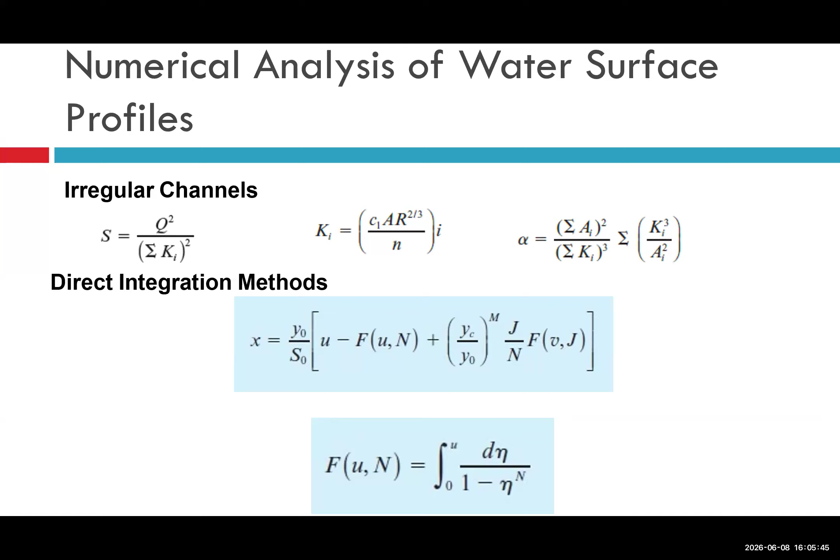Here, this is my case study: the Galudih Barrage at Jamshedpur on the Swarnarekha River.

This is a simulation which we have done. One of my PhD students has carried out this research, and in this we have simulated the Swarnarekha River. Here at the cursor point, the Galudih Barrage is situated, and this is the upstream side of Swarnarekha, where we have taken almost 3 kilometers upstream, and one tributary like Gara Nala, on my cursor, which is meeting the Swarnarekha River upstream of Galudih Barrage.

This simulation for the Gara Nala is also being done with the help of HEC-RAS software. This is open source software developed by USACE, United States Army Corps of Engineers services. So this is the open source software we are using for developing the simulation of this gradually varied flow.

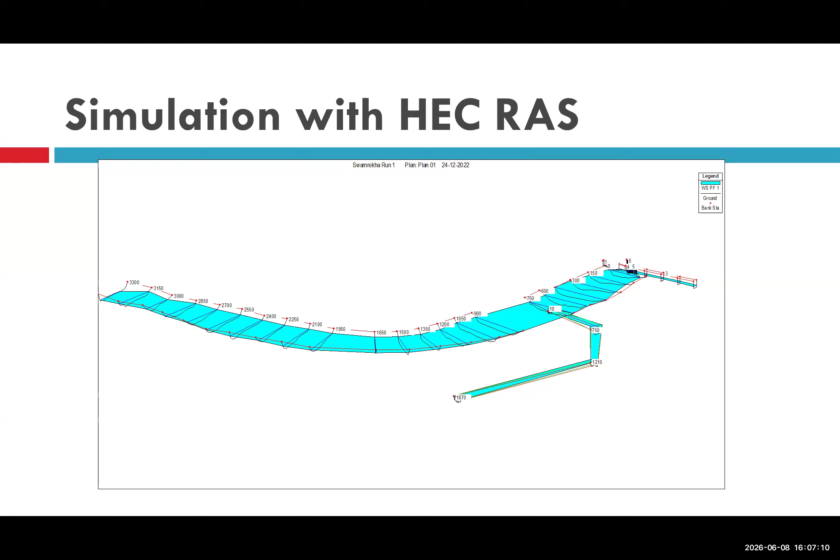And there we have carried out a profile. These are the several profiles at different cross sections. This is at Galudih Barrage, at a certain chainage. The second image shows the barrage station, and another one is shown at the Gara and Swarnarekha mainstream channel section.

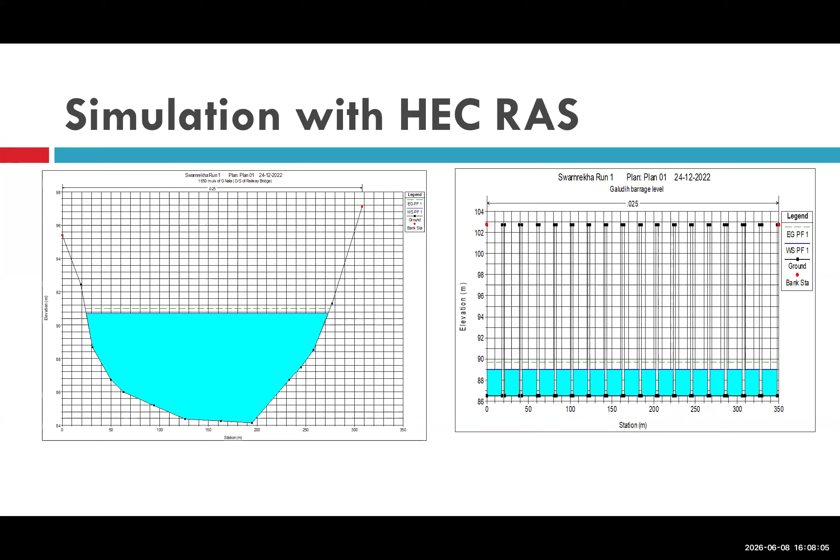Maybe this is the end of the slide. So thank you, I just conclude here.

Thank you so much, ma'am. Your valuable insights, ma'am.